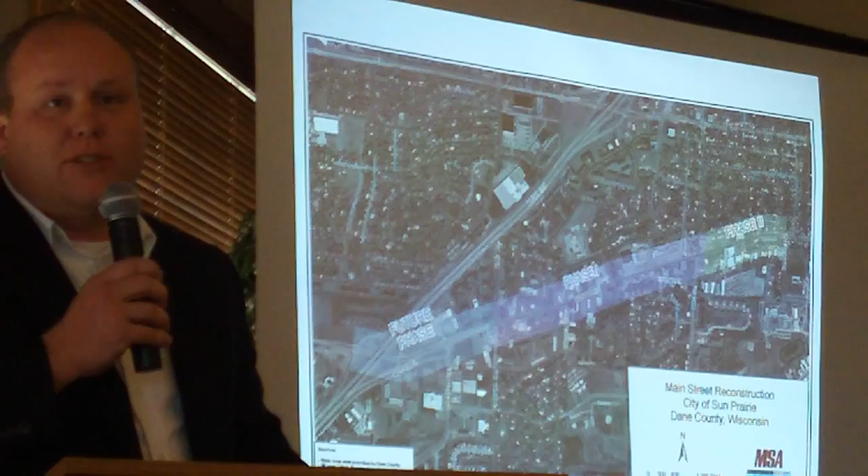Again, my name is Joe DeYoung, MSA Professional Services. As you can tell from this project, there are two parts, and the key behind this is more about funding and who's responsible for certain parts of the road.

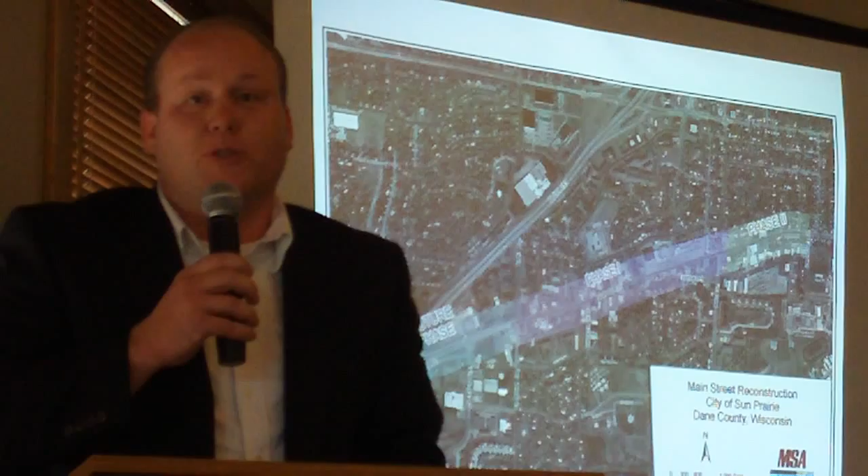To go back a little bit, I want to show you what we did last year, in 2009. It seems Main Street's been under construction for quite a while. We did a project a year or two ago, going from Cronky all the way to Claremont. What I found interesting is that it affected over 120 parcels and numerous driveways, being the main thoroughfare through Sun Prairie.

But when we put it in the paper and showed what the construction limits were, the number one question I got back was, why did we stop? Why did we stop at that location? Actually, a nice lady from down here called me up and said, you know, you missed the worst part of the road.

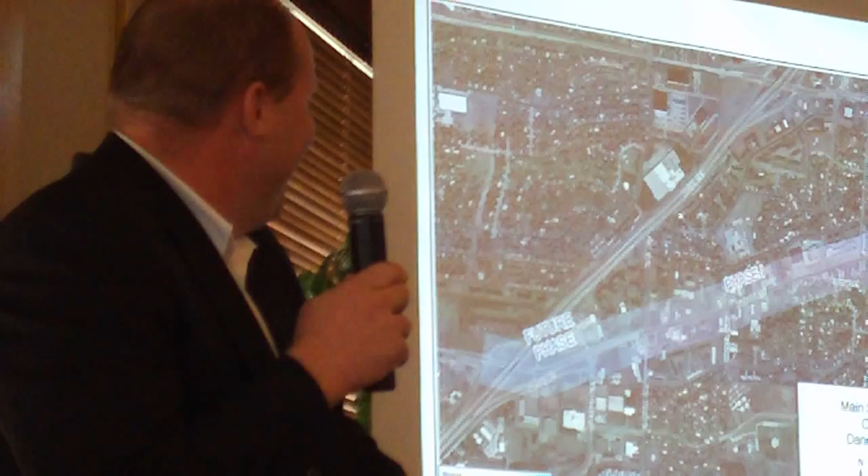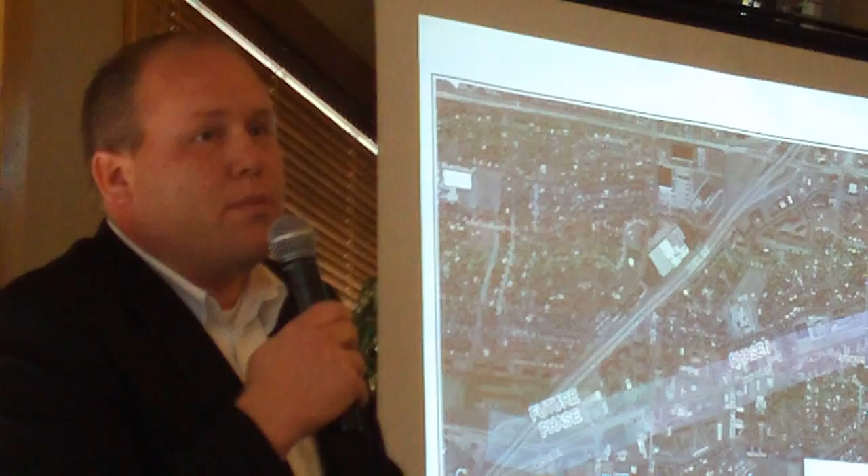What we described before, and what Daryl and also Dan mentioned, is that this is a two-part project. We have the DOT, who's responsible for between the ramps, and they have certain requirements for how to design it and accommodate the traffic of 151, making sure there's no backups and no concerns with the main thoroughfare road. With Main Street, ours was a little bit different.

Our concerns are more driven at O'Keefe. Everyone here has probably been through the O'Keefe intersection. It's got Walmart to the south and major turning movements in different directions. Not only do we have the through movement in both directions, we also have a significant amount of left turn movements coming through here, trying to get to Walmart and to the south down O'Keefe Avenue.

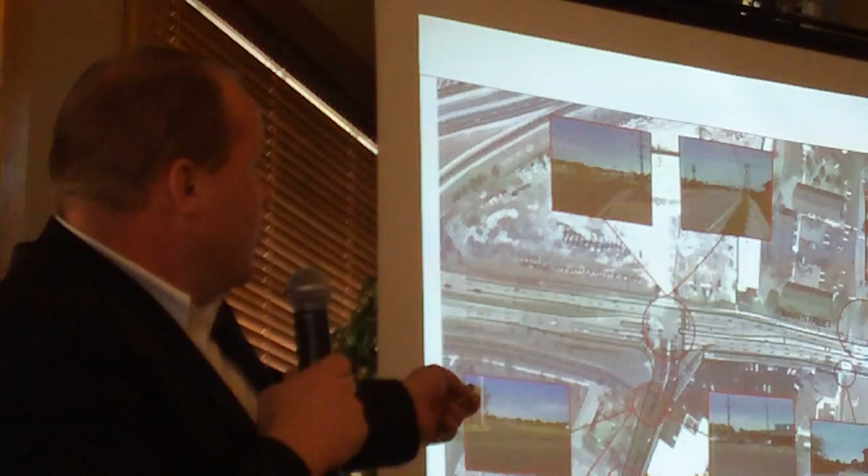One of the unique things is that we actually have a turning lane in order to get the Brooks tractor, which is very uncommonly used. So to provide them access to their business is unique, having this busy of an intersection yet very little use going into here. Providing timing for all this drove us to stop the project last year at this point at Claremont, just to give us the ability to design and work with the DOT to do the best job we can for O'Keefe.

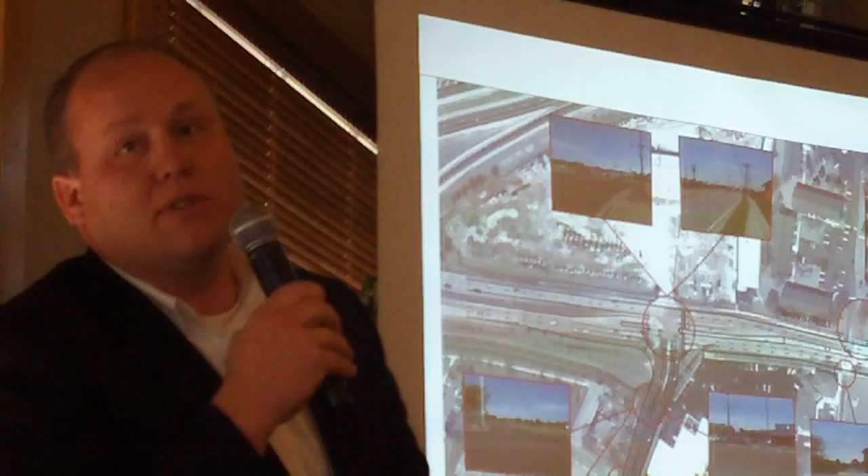A couple other concerns in this area - if you're not aware, I'm sure, McCoy Road has always been a concern. You can be sitting here backed up, basically waiting for a gap from a numerous amount of cars heading from the south, and then cars either making a turn from Main Street, coming off the ramps this way, and then also the left-hand turns. There's not a lot of gaps. And the distance from here to that point, plus where the driveway would start, is very limited.

Our goal eventually, and we'll talk about this a little bit, would be to realign McCoy Road. It's not being planned at this time, but it is a goal of ours to try and get this, creating more space and lining up with Sunfield Street.

Other concerns, we do have driveways still. We have a driveway into this large apartment complex, as well as a gas station, and the new eye doctor clinic and realtor office located here. Those driveways will still be accommodated, using the same procedure we used down the rest of Main Street.

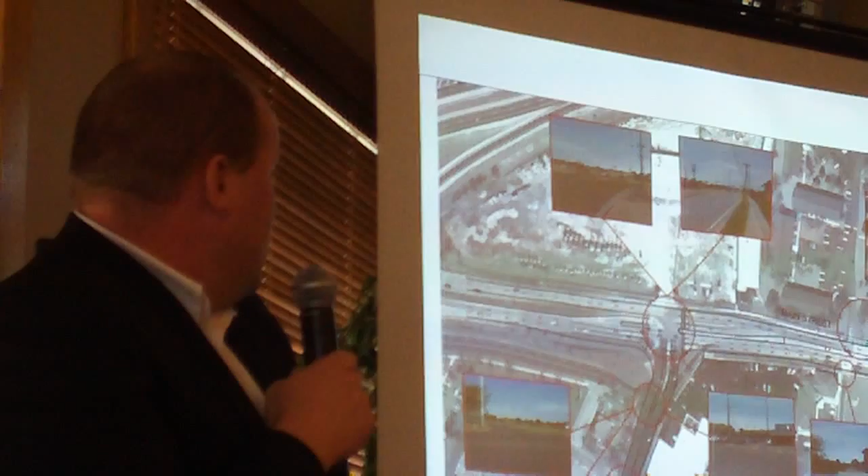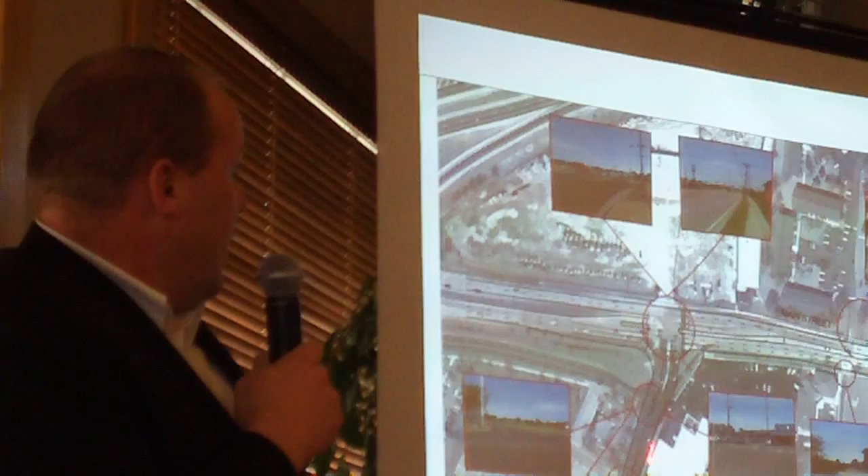Other concerns - we are putting in signals. There's been discussions about roundabouts, but what we're proposing and have had approved now is signals. Looking at providing signals at Sunfield does not seem to help. We will probably be limiting our signals to O'Keefe just because of the spacing between Sunfield and Main Street. It creates not enough gaps and causes concerns with cars backing up into that intersection.

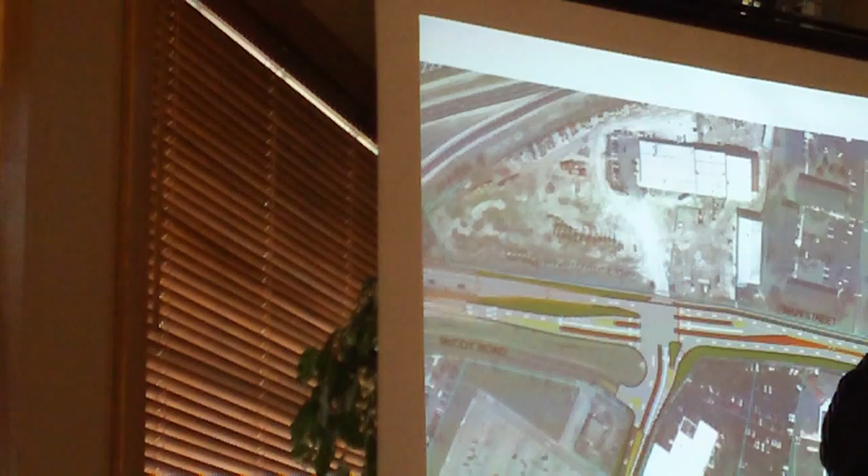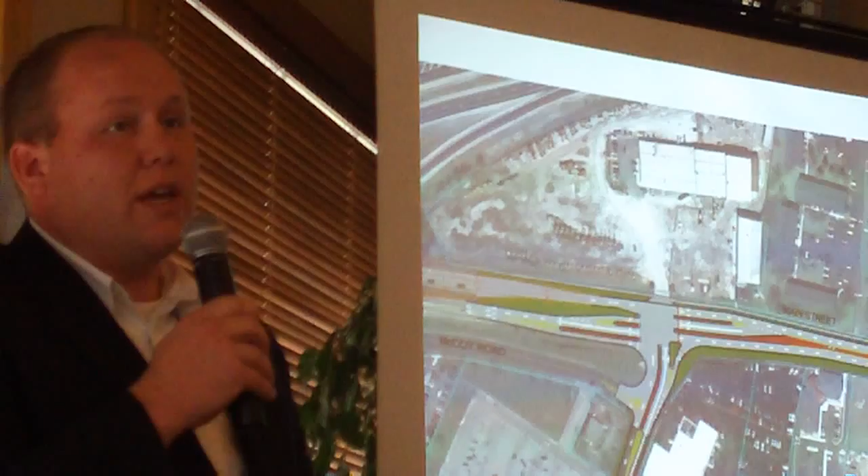What you see in front of you, and again, there are some displays in the back, so if you can't see it from back there, please come up and look at it later. This is what we have for the proposed layout currently for McCoy and the city's portion of the project, McCoy, O'Keefe, and Main Street.

Looking at this, as you can see, we are still proposing a twiddle, which is a two-way left turn lane for cars to get off and allow only 2 lanes of cars to continue, kind of what you're used to seeing with the last Main Street project.

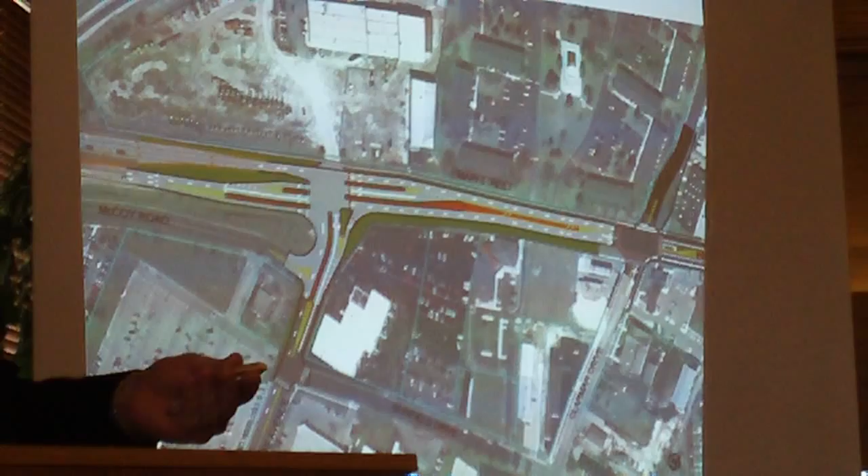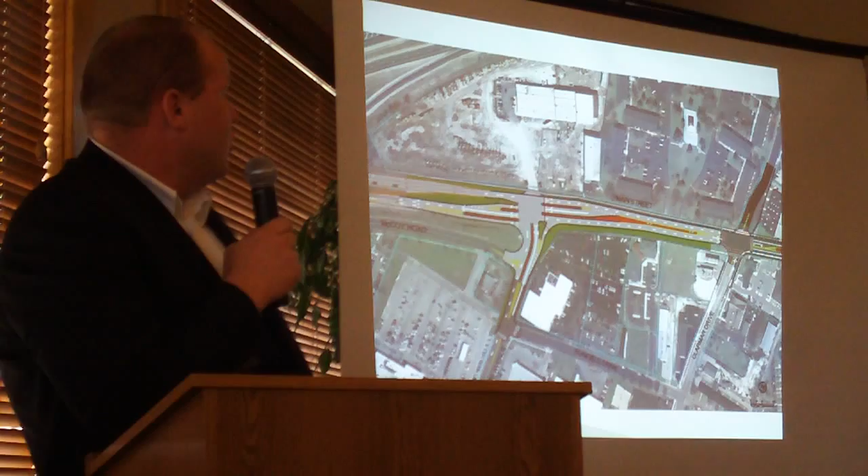Some of the other improvements, just like Dan said, we're increasing the queue distance. We're making more storage to provide more for it. Right here, you see these 2 lanes going off? Those are actually the 2 lanes for left turns heading onto the ramps. They go past both intersections. We'll be able to look at it later, but it actually goes back almost 200 to 300 feet away from the O'Keefe intersection.

So that's one of the bigger improvements you're going to see. What we also did is propose adding 2 lanes going through into the direction of downtown. There is the potential that we might add a third lane later. We've reserved room, as you can see, with a median here that lines up with this large terrace located on the south side of Main Street. We may need 3 lanes in the future.

Not really for function or level of service, but the reason for the third lane would be to provide less travel time. We can put more cars in 3 lanes and get them through faster. And in order to get them through faster, it gives us more time for these left turn lanes that occur frequently to the south on O'Keefe.

Other improvements, as I mentioned, McCoy Road. Right now, we're currently proposing a median from Main Street back through McCoy Road. And because we have to maintain McCoy Road at its current location, we're proposing a right in, right out. A semi can still make a turn through here with a large semi in order to provide service and get through McCoy Road from that movement. That's what we're trying to focus on.

Our goal eventually will be to maybe realign McCoy Road, as we mentioned, to Sunfield, but at this time, this is what we're currently looking at.

Other improvements, we still have the 2 left turn lanes. We've provided a tighter area. We don't have that slip lane anymore. There will be some more queue distance and the ability to stop here for right turn lanes on Main Street, but that's significantly the major improvements we're proposing.

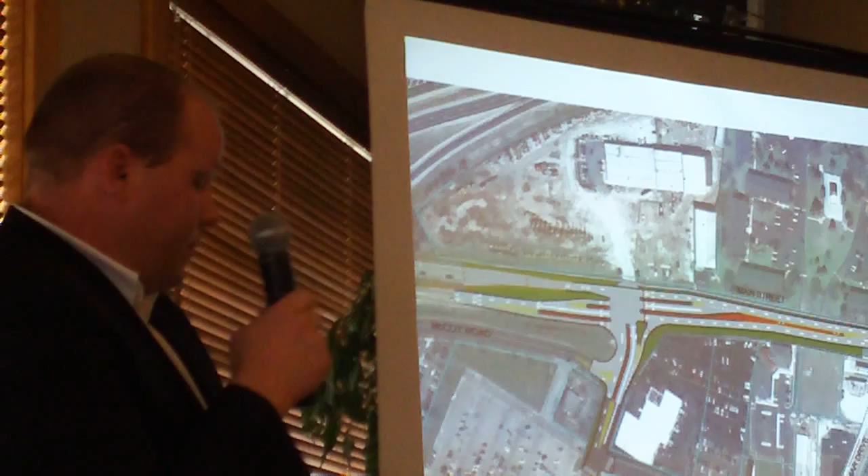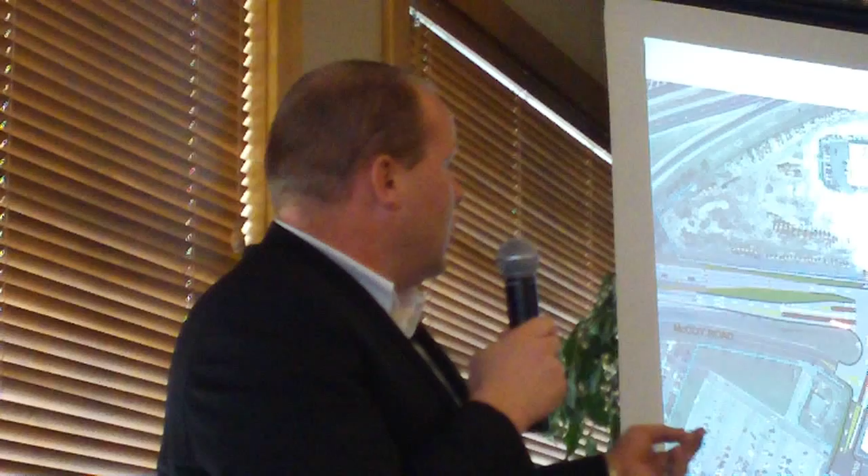So with that, I think we covered everything. It is concrete, and it's going to be maintained the same. There is a bike trail that's going to be maintained on the north side, as you're currently aware of. We're also planning for sidewalk that possibly could be on the south side as well. But again, that will not be connected up until maybe McCoy Road is realigned. Those are the things we're working at, tying in right where we left off and continuing through the project until we're past the intersection on the opposite side of Main Street.